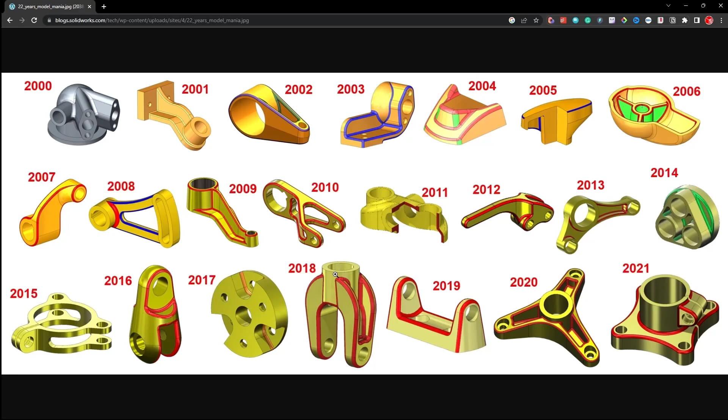We're at 2008 SolidWorks Model Mania. Let's do it. Let's check it out today. It's going to be this part right here, and that's an interesting looking part. It looks just like this one, but with a slot, I guess. Let me see. So let's head back. Let's check out the drawing. Phase 1 drawing.

And it looks like everything's gonna be centered except for this is gonna be an offset, so that's gonna be cool. Does it tell me how much it's offset by? 30. Doesn't give me. Okay, so material. Oh, this time they give us material. Dimensions so huge. I'm gonna go with millimeters again. I just wish they added it to the drawing. Weight: you tell me. Yeah, funny guy.

Okay, let's try this. So I'm gonna start with this boss first, do this slot here after, and then the center here. It's kind of really easy, but let's see if I bite my tongue right now. So file new, go to the right plane, sketch, boss here, diameter 35. Do the cut after.

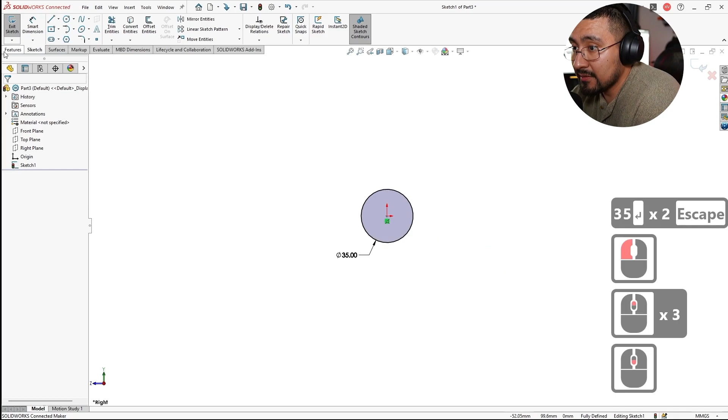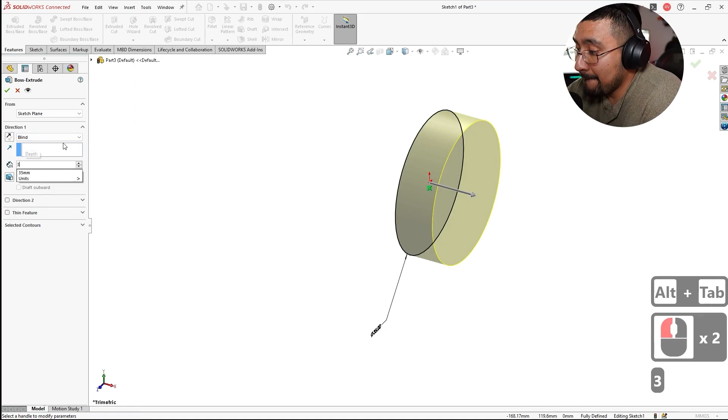See, this is the interesting part because I don't know. It's gonna be 2 millimeters offset from here, and this one's gonna be 1 millimeter. I'm not gonna do the math. I'm gonna do it exactly how they do it. So I'm gonna just extrude boss 30. Now I'm gonna go to the right plane, and I'm gonna do a slot on an arc. Just gonna do 3-point arc.

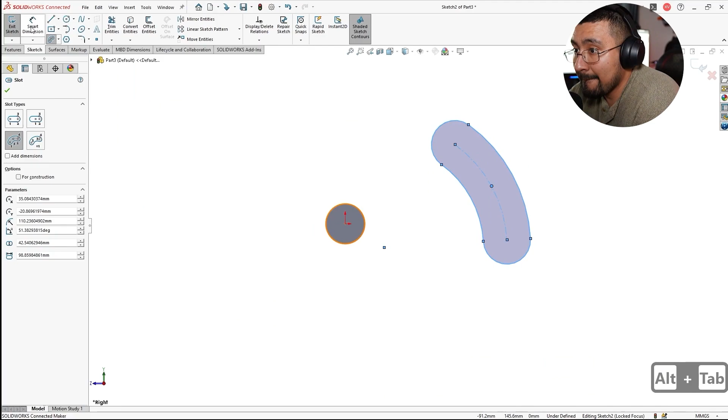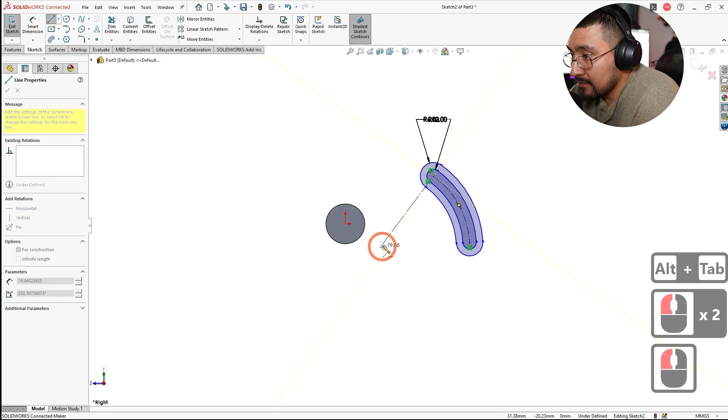And let's see what they say. So it's a radius 6 for the inside, 12 for the outside. So I'm gonna grab another arc. Six for there, 12 for out here. 30 degrees. And that's all to the center, and it's 100 radius. So go here, 100 radius.

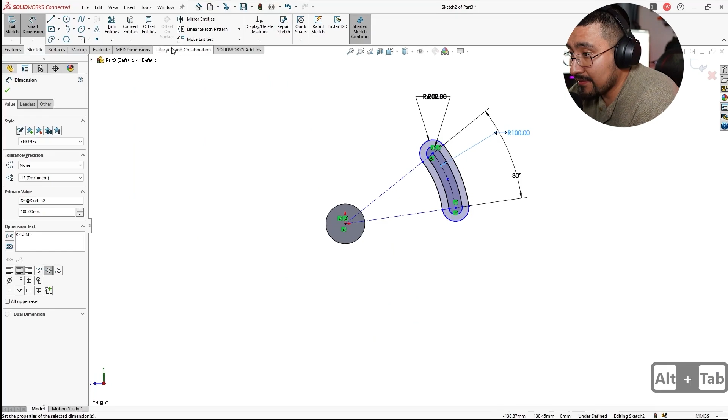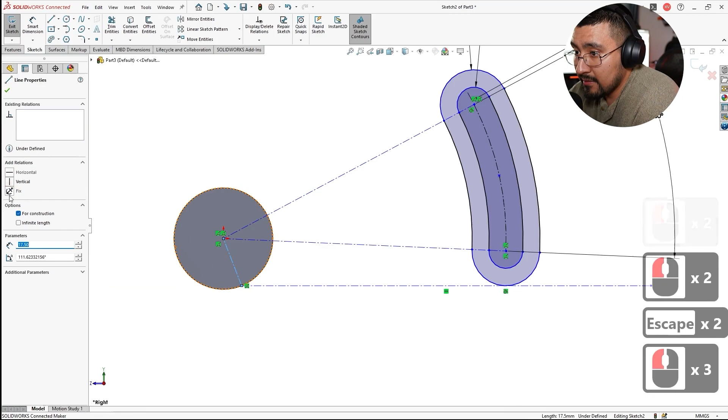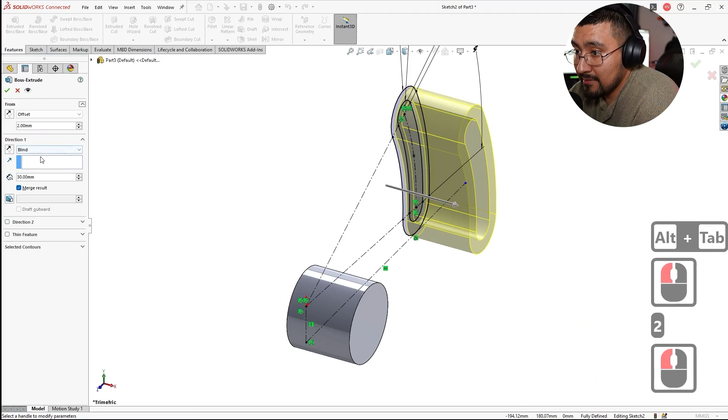And it's to the flat, so basically I'm gonna grab a center line to this point down here, make that floor, grab that circle, make it tangent. Now it's technically on the floor. Oops. I'm gonna grab another line just to make it vertical, just to make sure that's the very peak there. So vertical. There we go. And this one, it's gonna be offset, I believe 1. I don't remember. It's gonna be offset 2. Offset 2, 16. Blind 16. There we go.

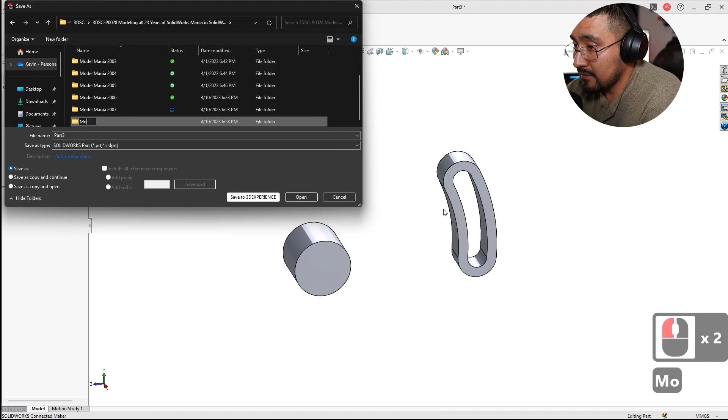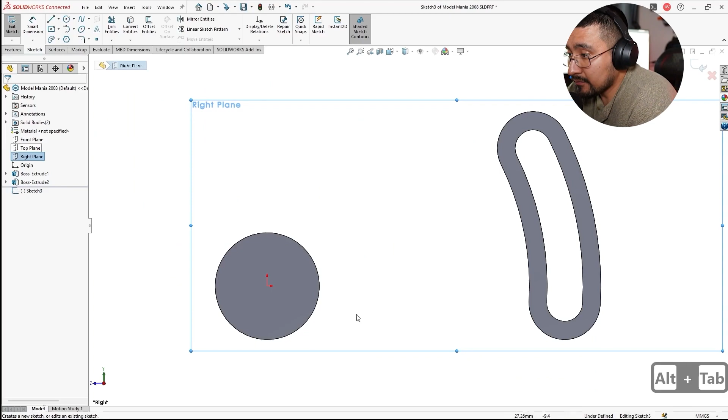Save that. And we're gonna do Model Mania 2008. New folder. Mania 2008. Now I'm going to do this piece here. And full radius. That's cool. 2 radius, 2 radius. 6. So I'm going to do this right here. Like that. Make this giant circle.

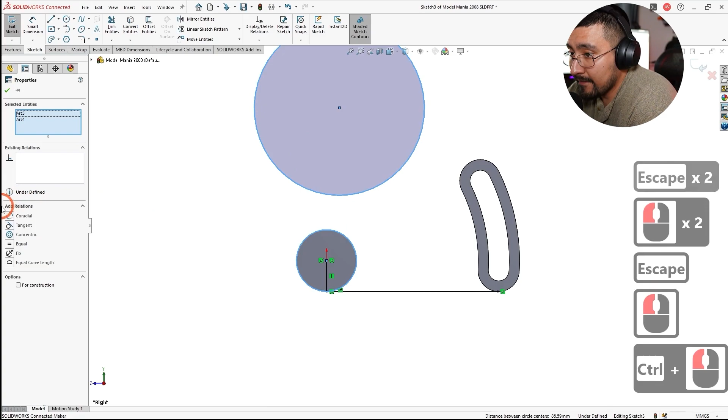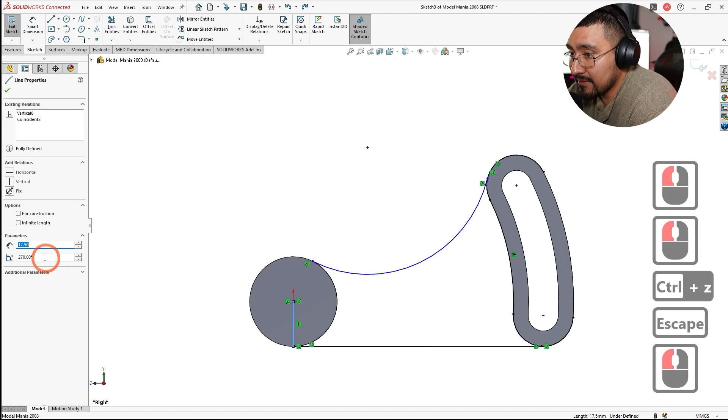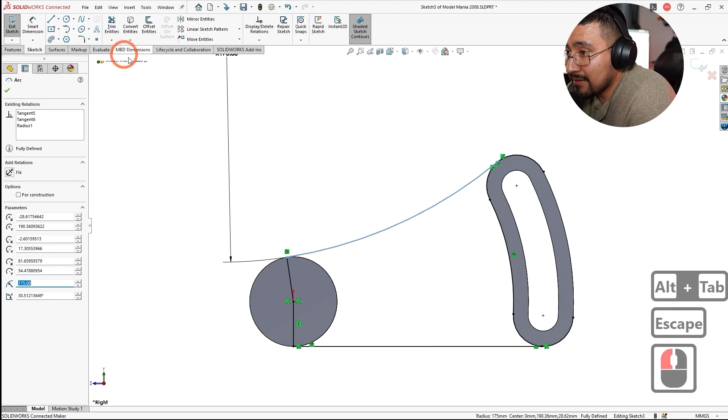Grab that right there, make this tangent. Is it tangent to the other side? Yes. Tangent to that side. Grab all these features in here to convert entities them. Trim that down. Trim that. Let's not trim this. Actually, I'm gonna need that. There's the diameter, and then 175 here. 175. And then right here is gonna be 6, 6, 6. Six offset. 6 offset.

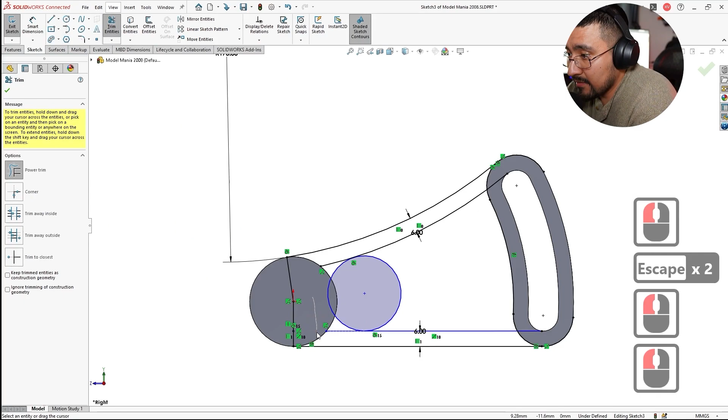I'm gonna grab another round. Do exactly what they said, the full round. Tangent there and there. We trim that. There we go. Oops. Trimmed, trimmed. Trimmed. And we're gonna add that wall later on. So I actually don't need the inside of here. We'll add the little radiuses after. And there's gonna be another 6 here. Let me delete that little arc in there so I can move that. And I could trim the rest of this off.

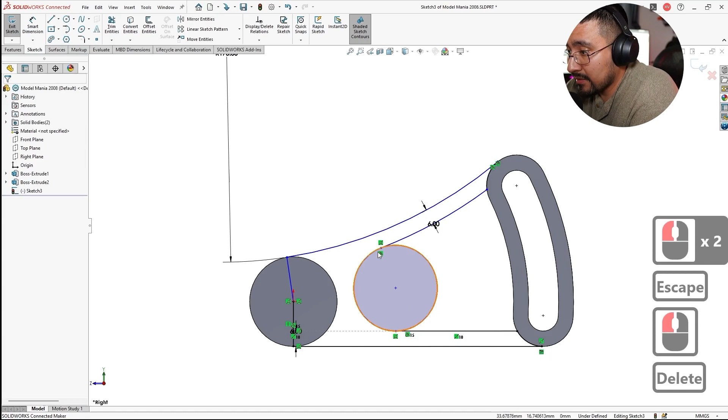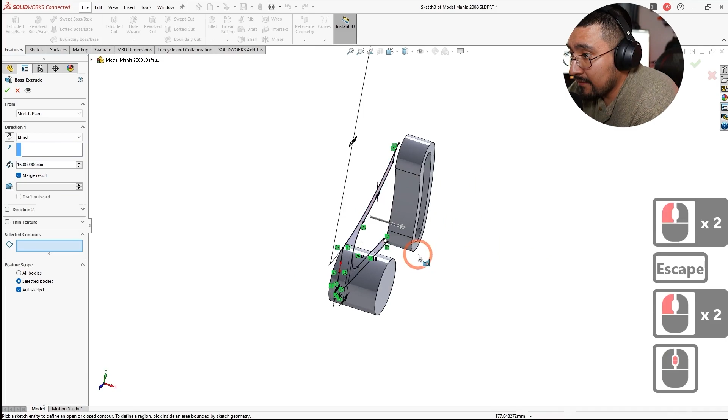And then hold shift between 2 circles, and you get the smaller dimension between the 2. This one's away, so I'm gonna add my tangency again. There we go. Add my trim again. This one is going to be, let's see, 14 millimeters and 1 millimeter difference from that. So 14 millimeters selected. And I'm going to do something here. I'm going to grab this face. I'm going to change this parameter to here so I can do that offset 1.

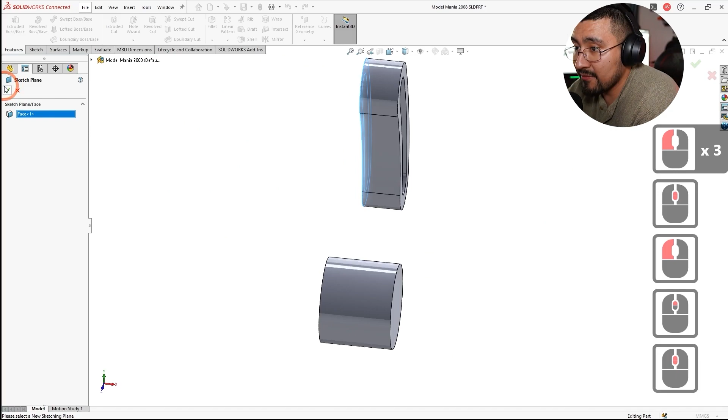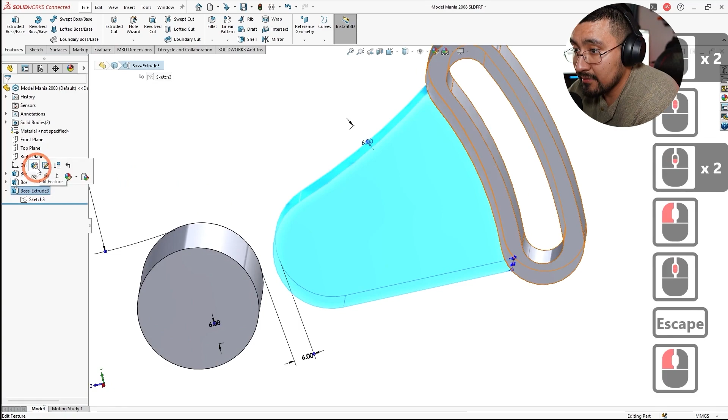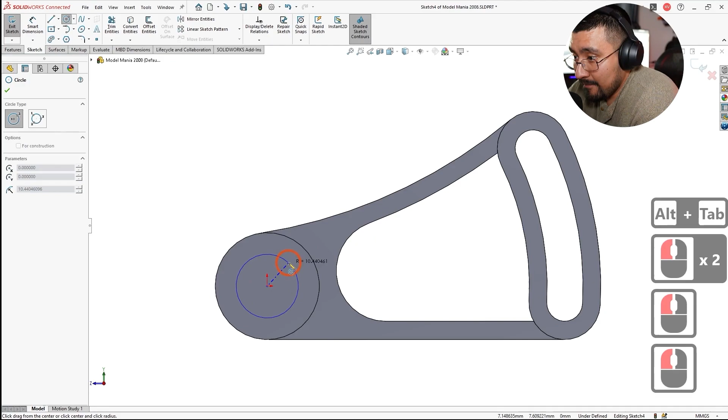Edit. Offset. Oops, not vertex. Offset. Grab vertex again. 1 millimeter. There we go. And everything's merged. And something didn't go right here. Select my regions. I grabbed the outside or the inside here. I didn't want that. And let's do this cut now. So it's 24.5, 6, 22. So I'm gonna do the same as I did. This would be 6.

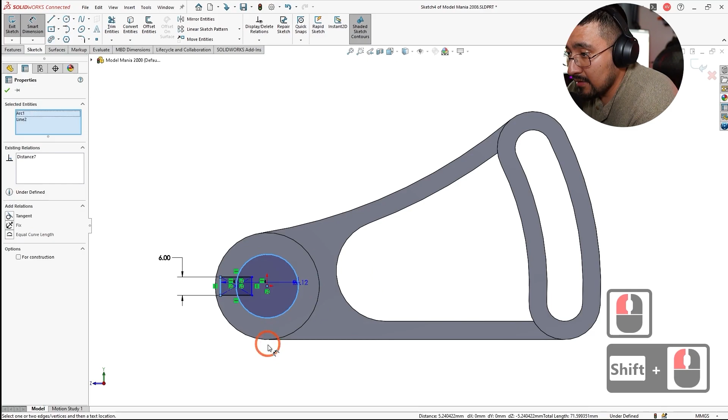We want to hold shift right there. Shift here. 24.5. I forgot the number for the other one. 22. Extrude cut. Here. Here. Here. Through all. Press OK. Done right there.

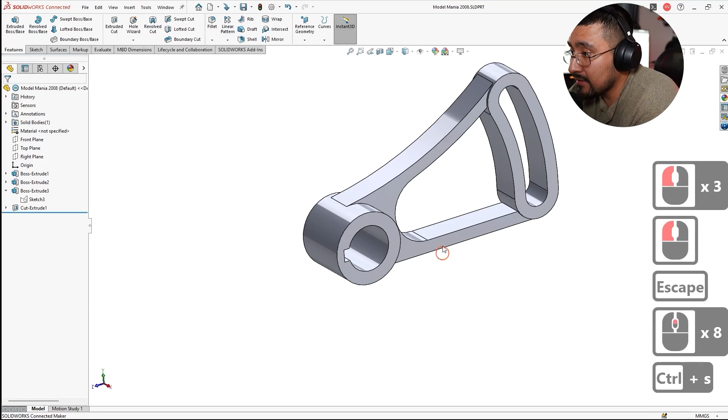Grab the fillet. And the fillets on the inside are going to be 2. Here and here. There we go. Let's change the color to that yellow color.

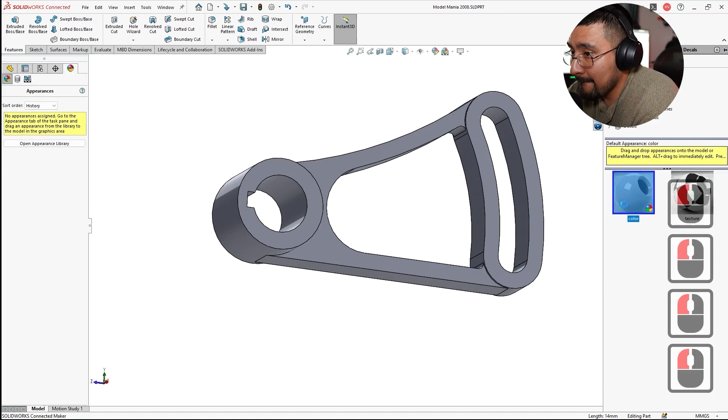I don't know why I did it that way, but just those kind of days.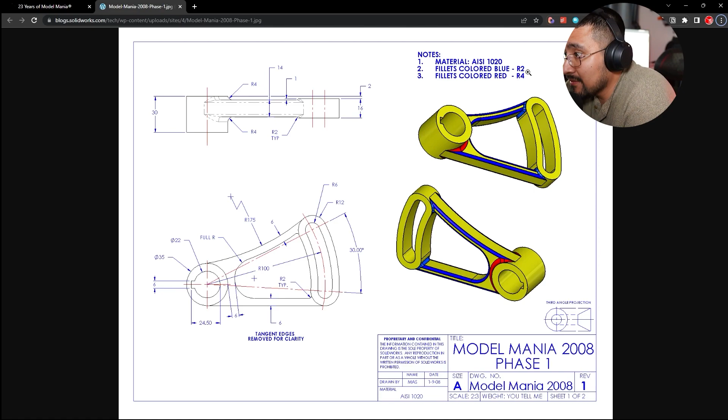It's going to be for the entire part, not just a fillet. There we go. And there's some outside fillets. So the blue radiuses are going to be 2, and the red ones are going to be 4. Actually, I probably could have done all that with this radius tool. So let's select this one, let's click the blue color.

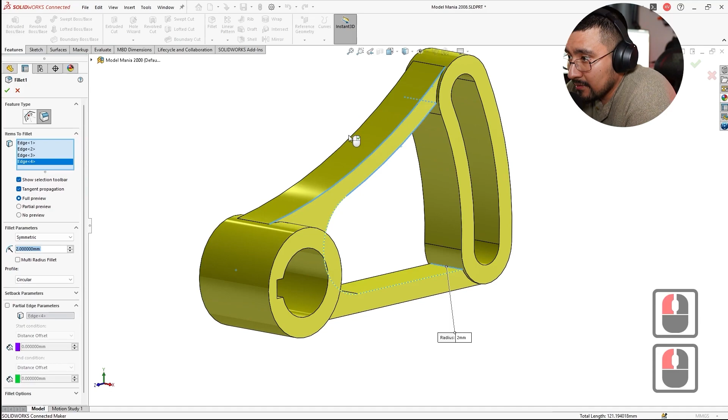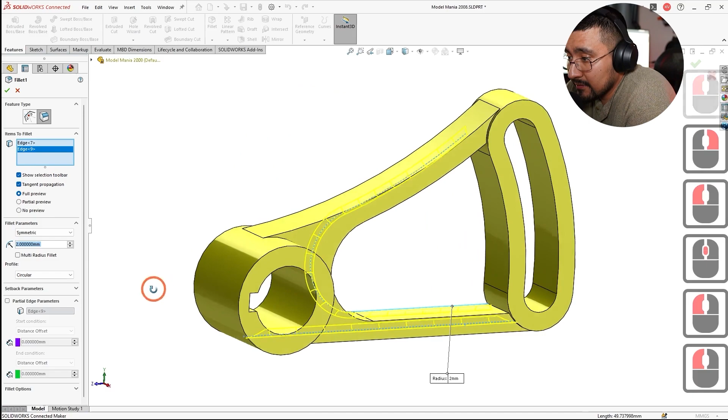And then I'm going to select all the way around it. Here. Is all the inside correct? Yes. Let me clear that. Let's do these first, because I don't think it will do the one around until I do all of these. And that might have to be a different fillet. And yeah, it's going to have to be a different one.

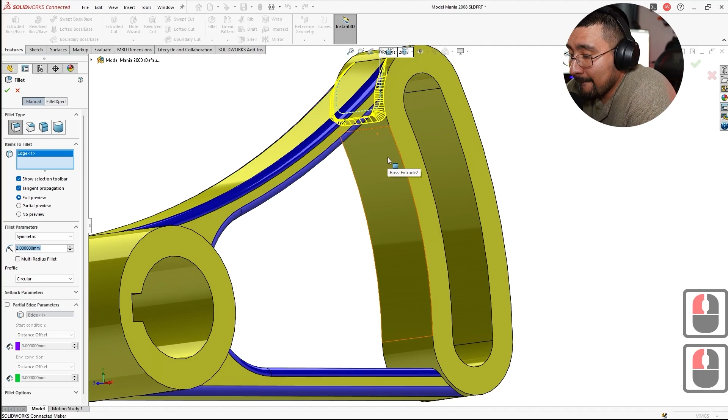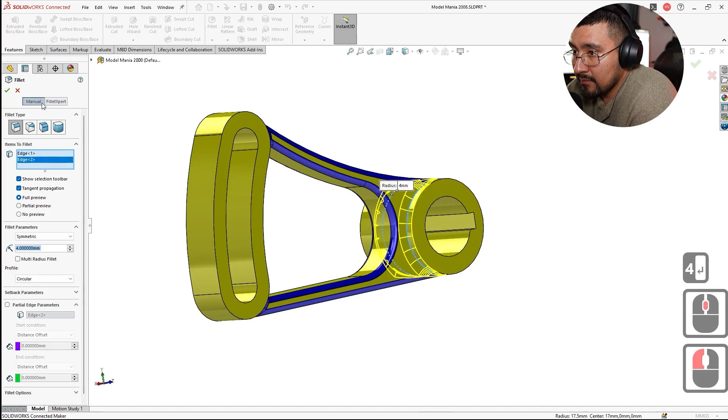That's correct. All the way over around. Change this one to that nice blue color. And then this one's going to be the 4. And then we could change this one to red. Save. Okay, cool.

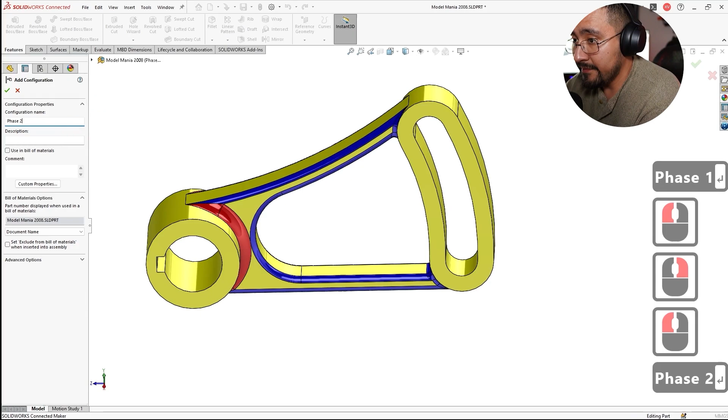So like all of them, rename this one. Call it phase 1. Add a configuration. Phase 2. Let me check out the drawing. The radius is 14, 1, 30, 16. Did I do 16 here? Yeah, I did 16. Yeah, I did 30. Okay, cool.

Let me go to phase 2. Whoa, what is this? Create a new configuration called phase 2. That's what we've done for this configuration only. Make the changes indicated in the views above. Dimensions and parameters are for reference only. Use Simulation Express or SolidWorks Simulation to analyze the 2 configurations and determine which is stronger. Highest factor of safety. Record the minimum factor of safety for each version of this part.

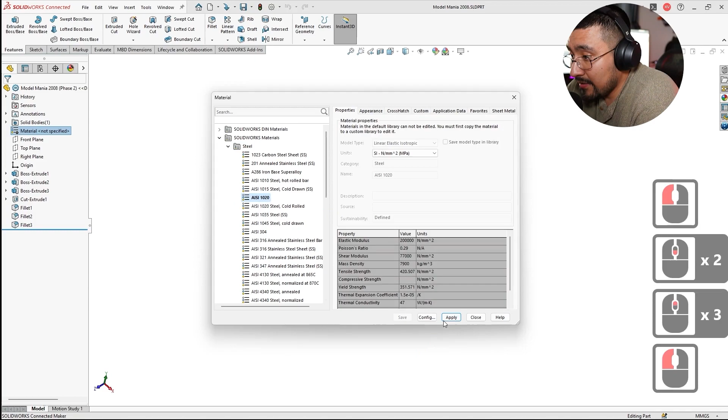Okay. I'm not even sure the SolidWorks Maker includes that with the package. We'll test it out right now. Radius 2. Oh, I forgot that actually. Before we continue, let's add a material to this. So this material, right click, add a material, and it's going to be a steel 1020. Apply. The appearance for the material is different than existing. Yeah, it's fine.

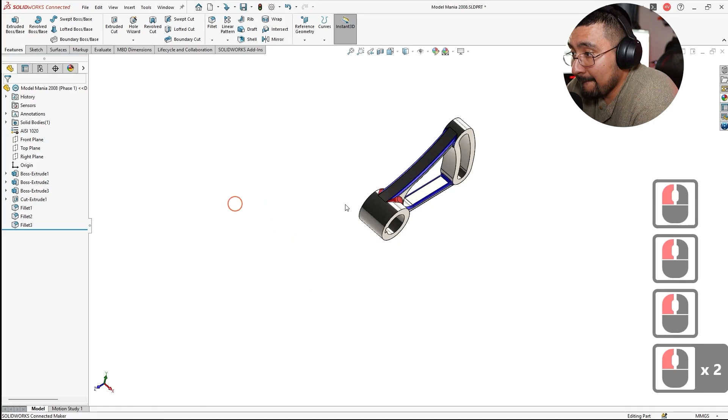And then hopefully that should be input for both. So you just do that one more time. I should have done it before I did the configurations. And then let's close that. And then I still want to go with that yellow color, but it's still steel. It's just a nice shiny steel. A very yellow shiny steel. Save.

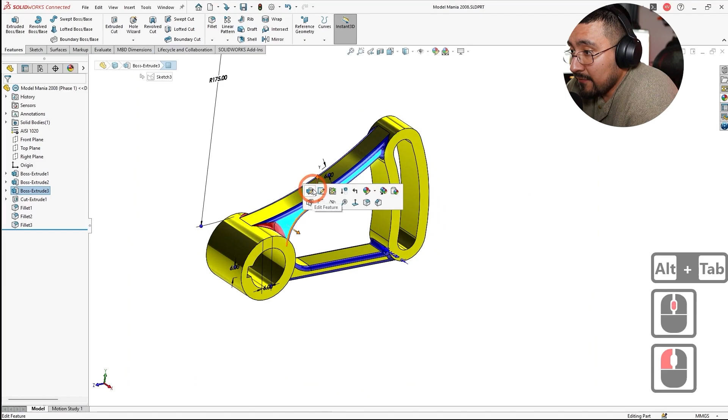And then let's check out the dimension changes. So now instead of, it's going to be 8, 2, 30, 16, a 4 millimeter offset, an 8 millimeter thickness. So it's all within this part mostly. So I'm going to put this configuration. And then from there to there, it's going to be 4 millimeter difference. And then it's going to be 8 millimeter thickness.

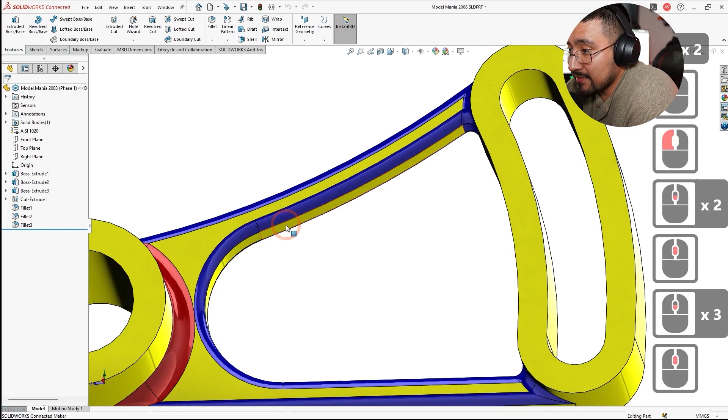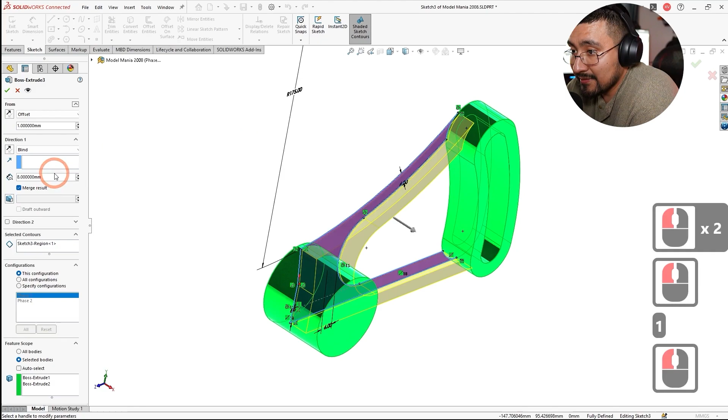Cool. And then the thickness of the rib. I am doing this configuration. No, I'm not. Let me Control Z. Well, that's gnarly. I might have to change it for this configuration. So 1 and 16. Go back to this configuration. So they didn't change here. I did a little mess up. It's 14, not 16. There we go.

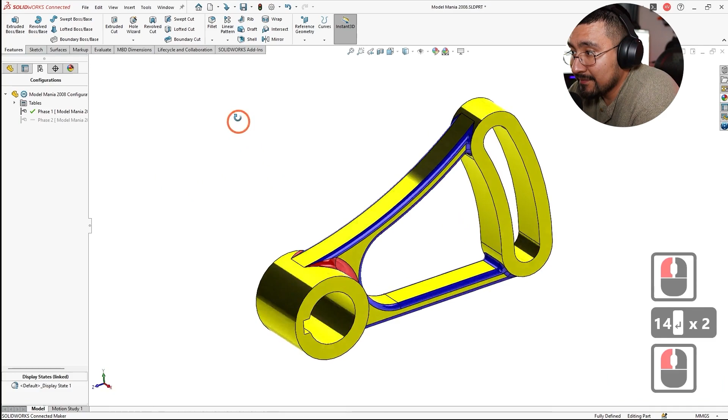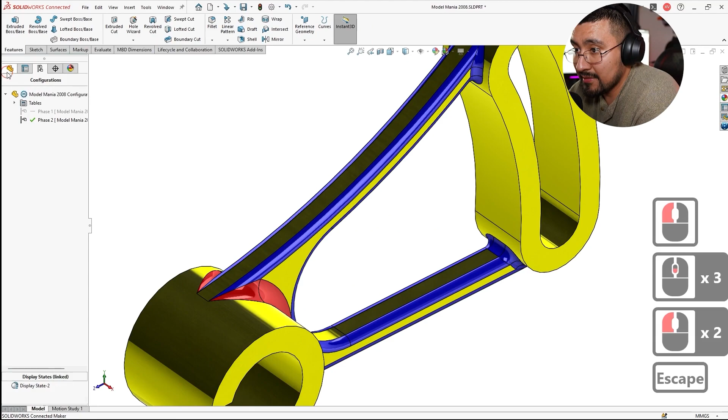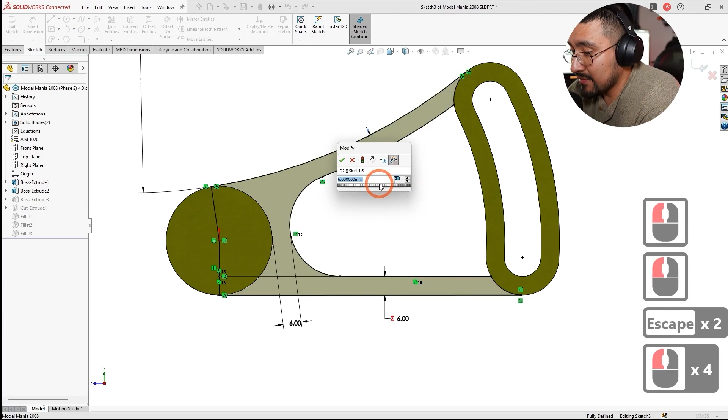Now I could change it. This one's going to be 4. Make sure it says this configuration, 4, yeah. And this one's going to be 8. And then here, oops, I'm going to go to the sketch now. It is the sketch. So here, there, let's make these equal to each other. Change this configuration. I'm going to change this to, is that 14 correct? Configuration to 14. There we go. Press OK.

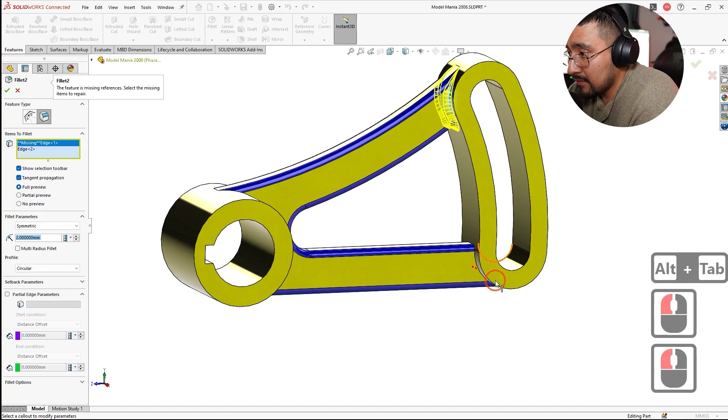The fillet now doesn't work. We have to drive that fillet around again. Let's choose this wall here.

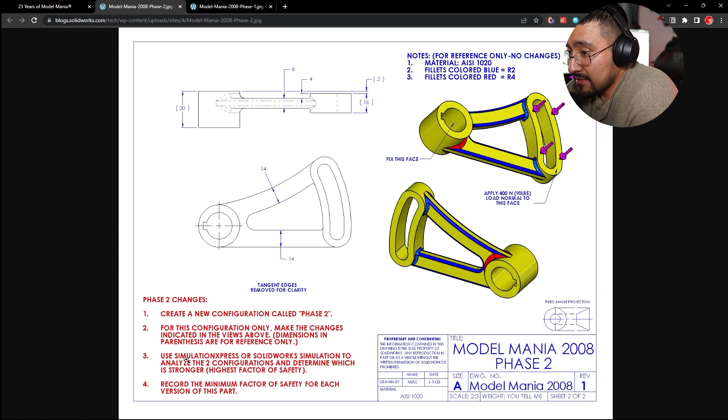Okay. 8, 4. Okay, so it looks like now we're going to change and record the minimum safety factor. So use Simulation Express. Control Save. And then we're going to head to Evaluation.

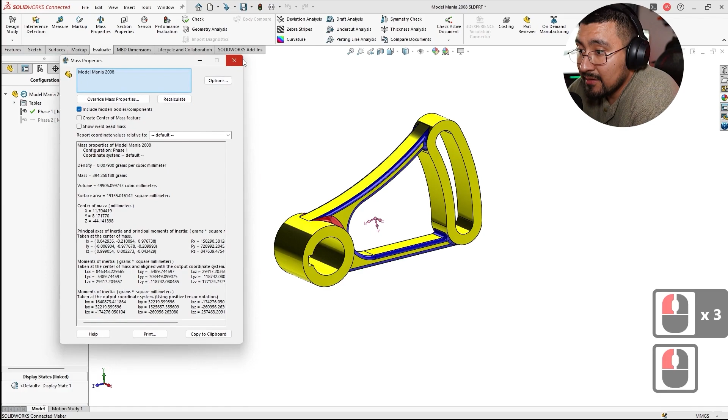Simulation Express. So at this point in the video, if you guys don't have Simulation Express, I'm going to go to Evaluate Mass Properties. Make sure you have the material though. Oh, let's start from phase 1. So phase 1, the mass and the volume. Then phase 2, the mass and the volume. And then compare that against yours.

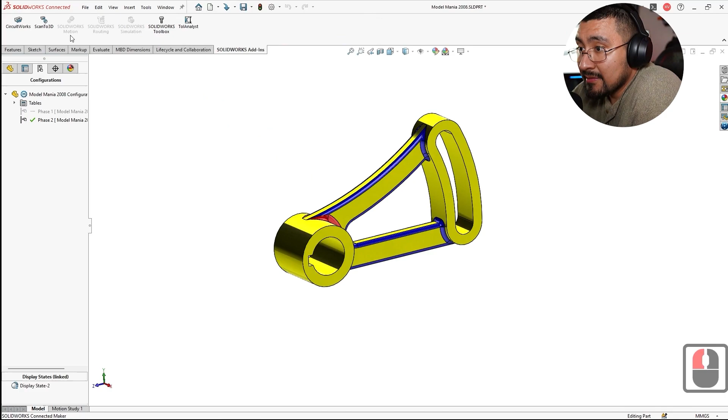And let's see if SolidWorks Maker includes the simulation package. I doubt it comes with it, but let's try it. Add-ins, motions. It does not come with simulations. Okay, so there's no simulation package in SolidWorks Maker. So I'll leave it here with the mass and the volume. You guys can compare it against your model.

Again, this model is going to be free for download to anyone that has SolidWorks Maker 2023. You guys can open this up. I don't think you can open it in the regular professional version, but you could try.

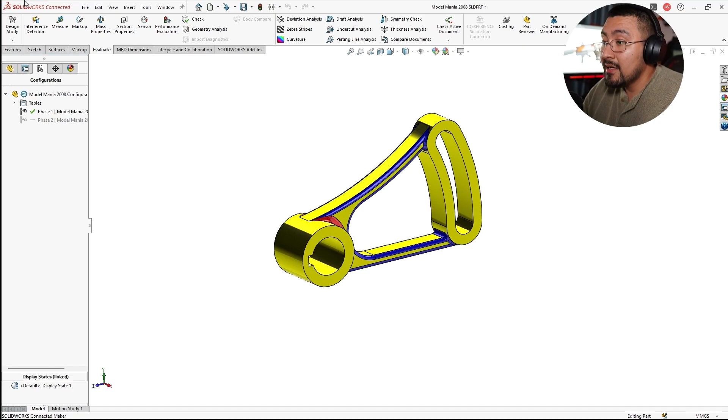A little bit of a different method, because SolidWorks Maker doesn't have simulations, and therefore I had to convert these to parasolids and reopen them in a different SolidWorks edition, 2020 to be exact, just so I could show you guys how to do the simulation portion of this Model Mania challenge.

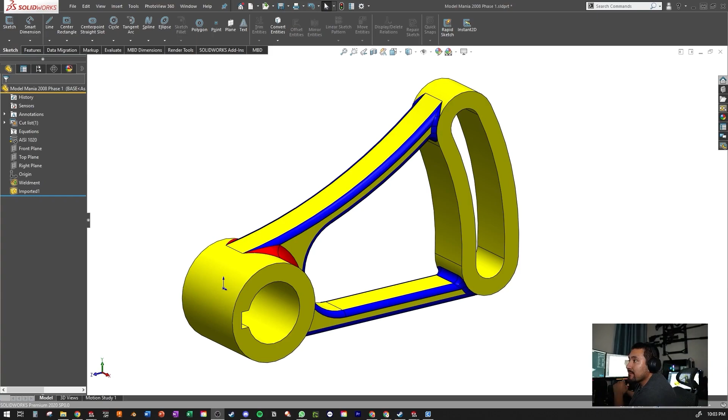So we're gonna go to Evaluate. We're gonna go to the Simulation Express Analysis Wizard. We're gonna head over to Next. I'm actually gonna remove my head here so you guys can see the screen. So apologies. And we're gonna add a fixture. This fixture is gonna be in here, and we're gonna press OK. We're gonna go to Next.

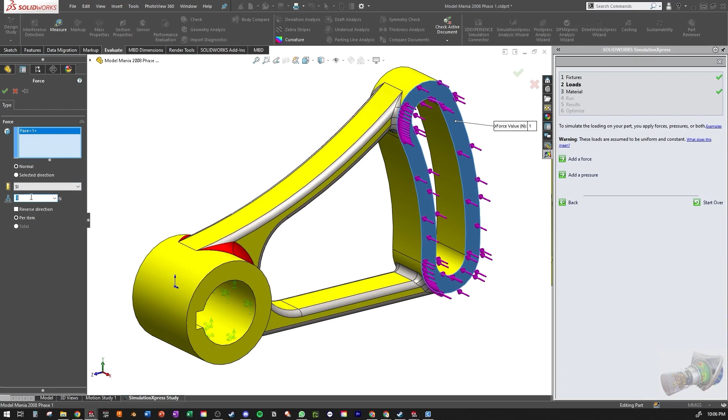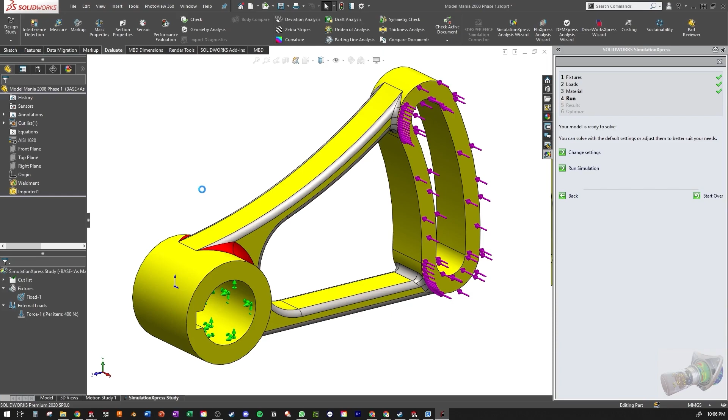And from our last one, we're gonna add a force. We're gonna add the force right here, and this one is gonna be 400 newtons. And we're gonna press OK. Then we're gonna head over to Next. We already have our material selected. And then we're gonna run the simulation. This should be relatively quick. And there you go. You can see the simulation stressing our part.

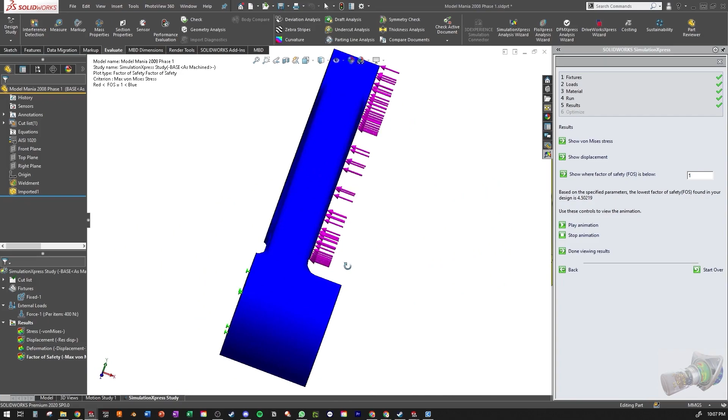And does the part deform as expected? Pretty much yes. So we're going to put yes and continue. And then right here, you can see based on the specified parameters, the lowest factor of safety is 4.5. And with these results, you could copy this 4.502. And this is phase 1.

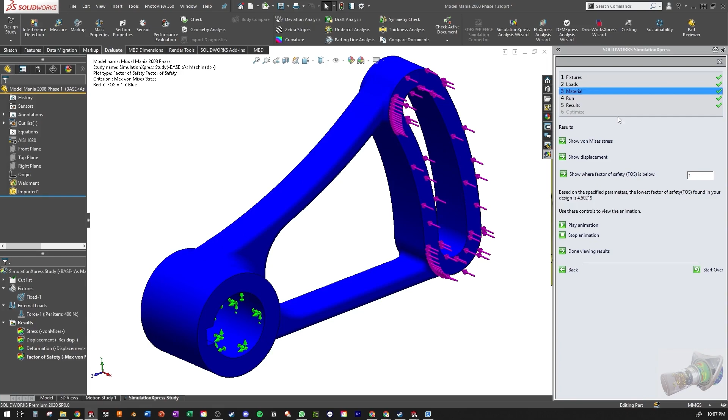Now, if you have SolidWorks Express simulations, you can actually flip between the two configurations. But in my case, I just saved them as 2 parts. So I'm gonna quickly redo these settings, and you guys will see the other side of it. And we see that the part that is stronger is the phase 1.

Let me put back my face so you guys can see my wonderful face.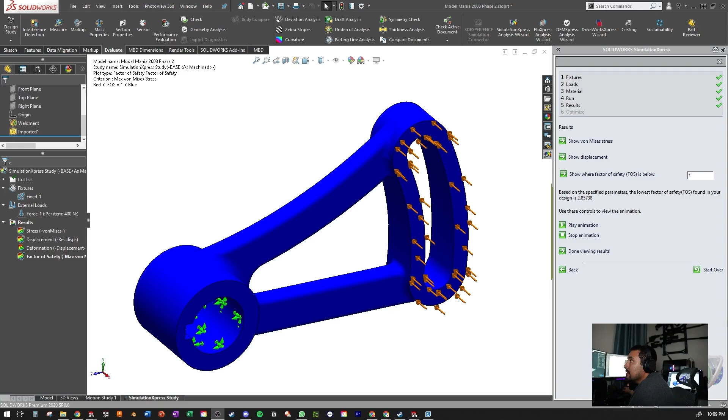So from that, you guys see that the phase 1 is the stronger of the 2 parts. Maybe I could... I don't know if I could do this, but yes. A higher factor of safety at 4.5 versus 2.8. So this one is the stronger part, and this has the lower factor of safety.

And that's pretty much it, guys, for this one. It's relatively easy. It's just having access to that SimulationXpress. Sadly, SolidWorks Maker doesn't have access, but maybe I'm wrong. Maybe they actually have access. I just wasn't able to find it.